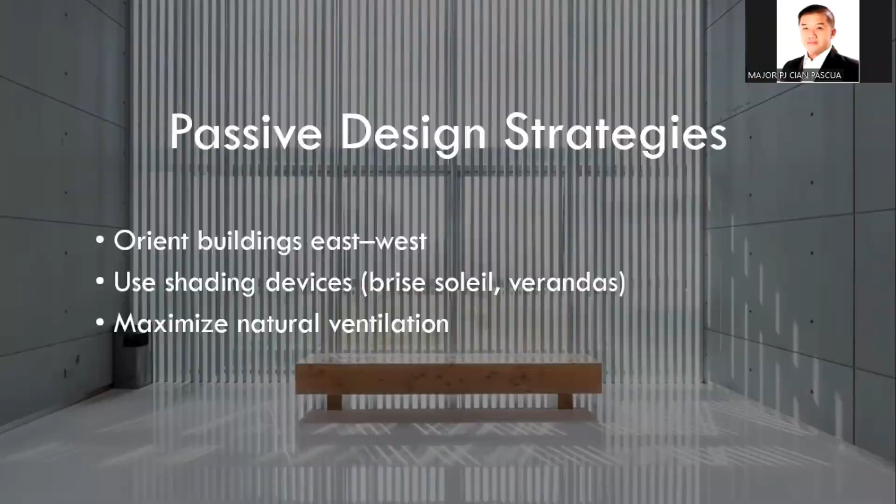Next is building envelope optimization. What does this mean? Improving our envelope reduces cooling needs. So after we've oriented the house properly and maximized our natural ventilation, the next step is to strengthen the building envelope.

What are building envelopes? These are the walls, roofs, and openings that separate indoors from outdoors. Number one is insulated roofs, or reflective roofs. In our tropical climate, the roof absorbs a huge amount of heat, so we use reflective roofing materials.

For example, light-colored metal sheets or even cool roof coatings. With these, we can reduce heat transfer inside our homes.

That's what we need to consider. Adding insulation under the roof, such as polyethylene foam or fiberglass, keeps the interior cooler and reduces the need for air conditioning. That's one. The next is better windows.

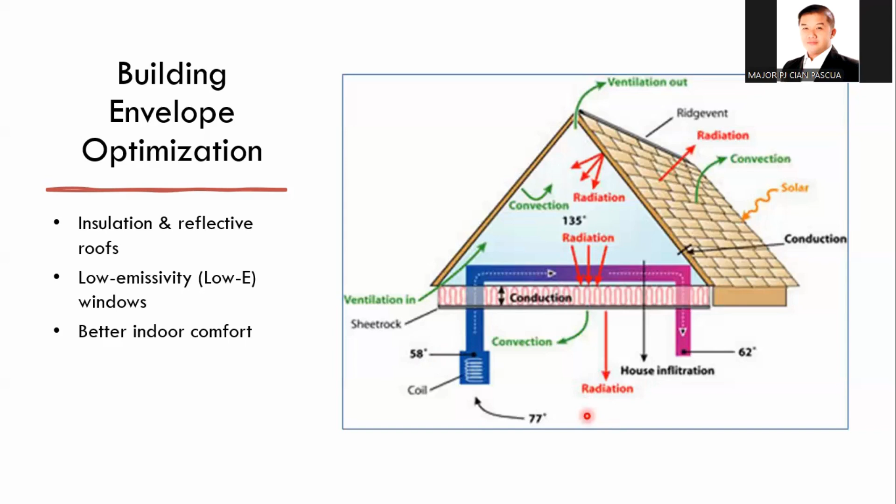This is where architects have to balance performance with cost. We need to choose solutions that are effective but still affordable - that's our goal. We shouldn't spend too much, particularly for socialized housing projects under BP 220.

Next, active renewable systems. These are solar potential technologies. After we maximize passive strategies in optimizing the building envelope, we can take things a step further with active renewable systems - technologies that actually generate clean energy for the home.

Number one is solar panels. We have excellent solar potential, with sunshine available all throughout the year. By installing solar panels on the roofs, households can generate their own electricity. For some families, this means significantly lower monthly bills or even selling excess power back to the grid through net metering, which is supported by RA 9513. But again, we need to check if it's within budget.

Battery storage: solar panels work best when combined with batteries. Energy generated during the day can be stored and used at night. This is especially useful in rural barangays or off-grid areas where electricity supply is unreliable - that's where it's really used.

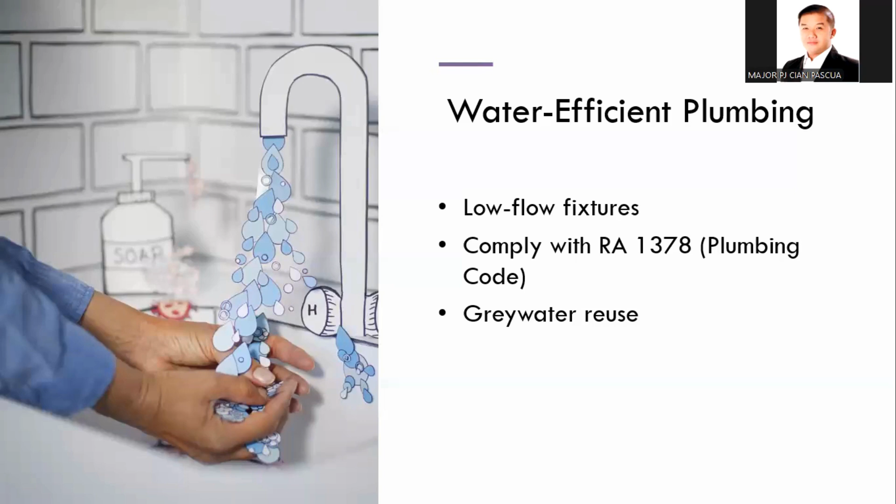Okay, let's talk about rainwater harvesting - rainwater as a resource and mitigation strategy. This is a great way to make housing more sustainable. Simple lang, it's about capturing and storing rainwater for later use.

The concept is easy to understand. Rainwater falls from the roof, gets channeled through gutters, passes through a basic filter, and then gets stored in a tank. From the tank, this water can be used for flushing toilets, cleaning, or watering plants. Some advanced systems can even make rainwater potable after proper treatment.

Next, local ordinances encourage its use. In many cities in the Philippines, Quezon City being a good example, developers are required to include rainwater catchment facilities for new projects. This helps address both water shortages and flooding problems, since the excess water gets collected in rainwater harvesters.

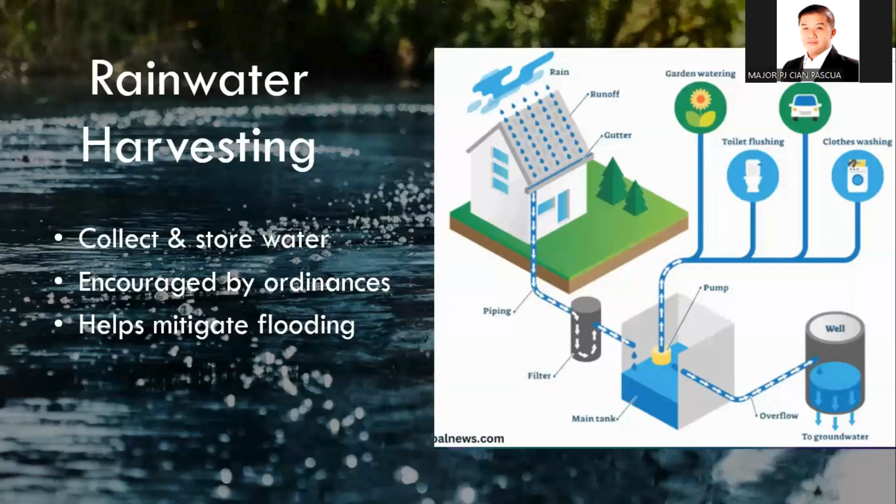So for architects, planning for rainwater harvesting is very helpful. It's not complicated - it just requires forethought in the roof design, gutter placement, and space for storage tanks. It's a small design decision with a big community impact. It's a great idea for everyone.

Next, sustainable materials. Material choice impacts both cost and sustainability. It can reduce embodied energy - every material we use has what we call embodied energy, which is the energy spent to extract, process, transport, and install it.

Concrete, for example, has very high embodied energy due to cement production. When we choose materials with lower embodied energy, like bamboo, recycled wood, or locally sourced bricks, we reduce the project's carbon footprint. That's what we need to embody.

Next is the life cycle view. We need to consider a material's entire life cycle, not just installation, but maintenance and eventual disposal. For example, a cheap material that breaks down quickly and has to be replaced every 5 years might be more expensive in the long run than a slightly pricier but durable option.

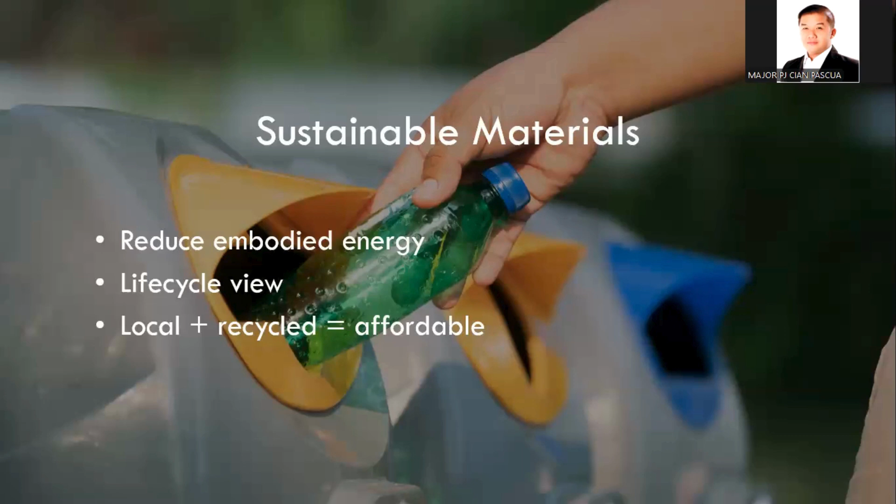As architects, our material choices can either harm or heal the environment. We need to think about whether this helps the sustainability of the design. Even if some materials are a bit expensive, it helps us design houses that are affordable, durable, and eco-friendly in the long run. That's what we need to keep in mind.

Locally sourced materials - these are traditional and sustainable local materials. This is one of the simplest ways to make housing sustainable: the use of locally available materials.

First, bamboo - often called the green steel of the Philippines because it's fast growing, lightweight, and very strong if treated properly. It can be used for flooring, walls, and even structural framing. Plus, it's part of our cultural heritage - think of the traditional bahay kubo. It stands the test of time, with longevity as long as it's used properly.

Next, coconut lumber - a great alternative to traditional wood with proper treatment. It becomes durable enough for housing components like roof framing and partitions. It also helps utilize coconut trees that are no longer productive.

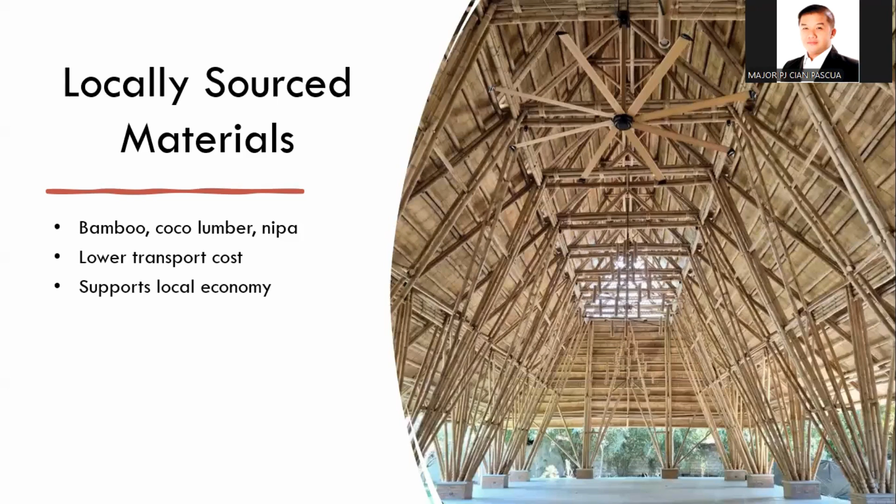Okay? So using local materials reduces transport cost, which means lower carbon emissions and cheaper housing construction. It also supports local economies by creating demand for community-based productions. So, as architects, we can help revive these traditional industries while creating modern, climate-appropriate designs. So, it is our call for this. Okay? So, next,

recycled and low embodied energy. Okay? So, recycling in the Philippine context. So, another powerful way ito in housing sustainability. So, recycled or low embodied energy. So, fly ash concrete and recycled aggregate. So, ano ba yon? So, fly ash is a byproduct of coal power plants. And instead of letting it go to waste, it can be mixed with cement to make concrete stronger and more durable, while reducing the need for new raw materials.

Similarly, crushed old concrete can be reused as aggregates for road base or non-structural components as well. Sa mga floors, ganyan. So, reclaimed wood and steel. So, old wood from demolished houses or construction sites can be treated and reused for furniture, partitions, or decorative elements. Okay? So, reclaimed steel naman can also be reforged for new construction. So this practice not only saves money but also reduces demand for logging and mining. Okay?

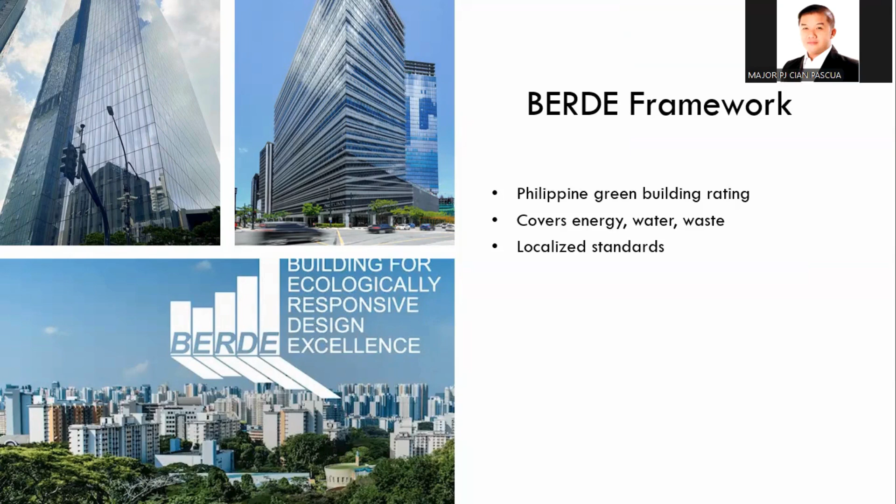ito naman yung LEED certification. So, kung yung BERDE is local, then we have the international counterpart, which is yung ating LEED certification. So, ano ba yung LEED? So, LEED stands for Leadership in Energy and Environmental Design. And it's one of the most widely used green building rating systems in the world. It was developed by the US Green Building Council, but is now applied globally, including syempre dito sa atin sa Pilipinas.

So, like BERDE, LEED measures performance in categories like energy and atmosphere, which is efficiency and renewable energy use; water efficiency, indoor and outdoor water savings; materials and resources, use of recycled and low impact materials; then indoor environmental quality like air, light, acoustics, yan kasama. So, ano bang difference nito sa BERDE? So LEED is internationally recognized.

Yun lang naman yun. So developers who want to market to global investors often prefer this. So for example, many grade A office buildings in Global City, which is BGC, are LEED certified because it attracts multinational tenants. For you as future architects, knowing how LEED works gives you an edge, specifically if you work on projects with international clients or in multinational firms. So you need to apply and consider this, okay? So isa pa sa mga pwede natin gamitin, pwede tayong maging LEED accredited professionals. So you just take an examination for this, and this is a valuable credential for careers abroad, okay?

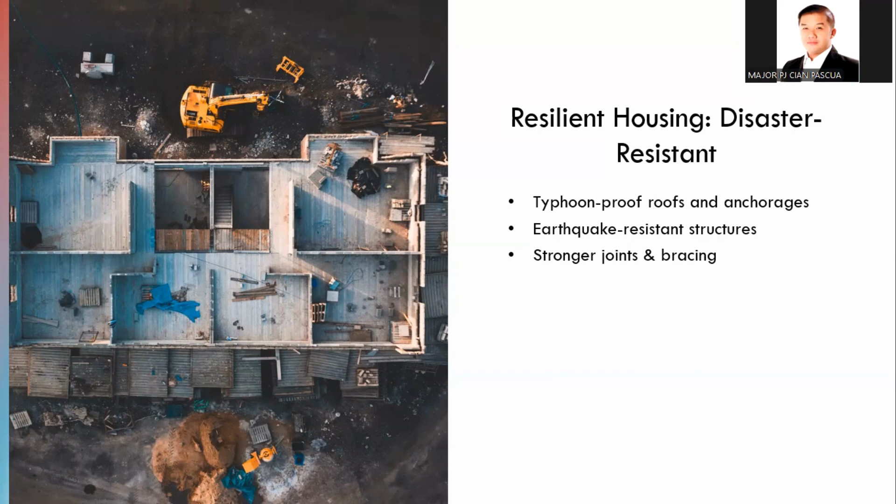So now that we know how to make houses stronger, isipin naman natin yung flooding, which is one of the biggest urban problems. So ito naman yung ating gagamitin, which is yung flood mitigation strategies. These are the challenges that we are facing right now. Sustainability is only part of it, again, as we have said. Sustainable houses that collapse during typhoons aren't truly sustainable.

So, ano ba ang pwede natin gawin with this? Flooding is one of the most common problems dito sa Pilipinas, lalo na sa Metro Manila. If we want housing to be resilient, it has to be designed to survive floods. So number one, elevated housing design. One of the simplest strategies is to raise the floor level of the house above the flood line. This can be done using stilts, like the traditional bahay kubo that we have. Many resettlement projects now require a minimum elevation to avoid water intrusion.

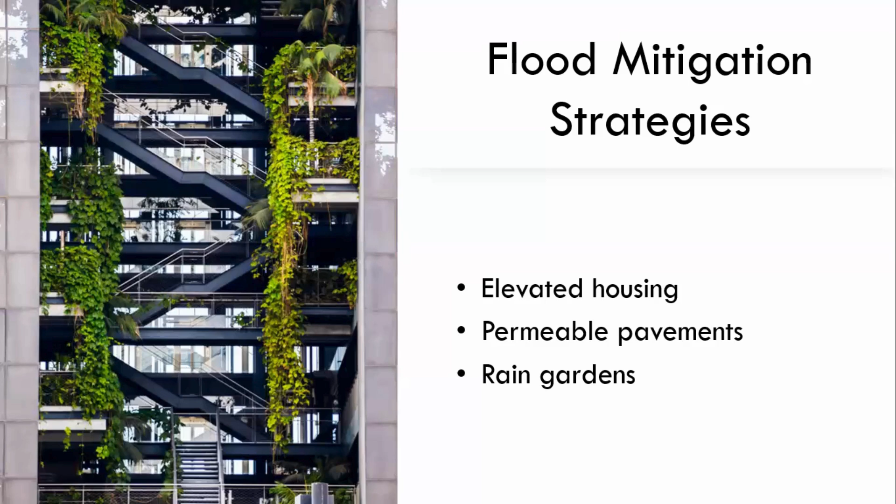So, as architects again, we should think about site planning, not just the house itself, to make sure that the entire community can handle heavy rains. Designing for flood mitigation is cheaper than disaster recovery. Okay? So next, yung ating Philippine codes and laws. Everything that we've discussed, from energy efficiency to disaster resilience, must be anchored on our Philippine building laws and codes.

So number one, again, our National Building Code, our Bible, the PD 1096. This is our baseline. It sets minimum requirements for safety, structural stability, fire protection, sanitation, and accessibility. So whatever sustainable or resilient strategies we use here must still comply with the law.

Okay? So, the Philippine Green Building Code. This is relatively new and supplements PD 1096. It encourages energy and water efficiency, proper material use, and good indoor environmental quality. So if your project is large enough, like a big housing development, compliance with this code is mandatory.